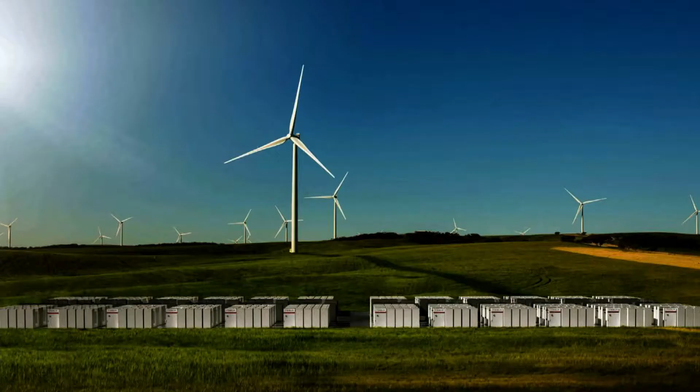And one of the biggest challenges that we have, as Joe alluded to, is how to deal with intermittent solar and wind power. These are zero carbon sources. We have a few others, but these are becoming very cheap and are being deployed at grand scales across the globe. And they bring us to a peculiar stage in how we use electricity.

So again, something that Joe spoke about, if you look at the chart on the slide, that's an average day in California. It might be a hard chart to read on the screen, but basically the top line is what electricity consumption on a typical day was in 2012. So you started at about 20 gigawatts at 12 at midnight. While people are sleeping, electricity consumption tends to be fairly stable.

And then it increases as people go to office and turn on air conditioning or whatnot. Goes down again at lunchtime, and then peaks back up just before dinner. Everybody's got their TVs on or whatever. That was 2012, right? That's just 6 years ago when California started deploying large amounts of solar, utility scale, but also rooftop solar.

And what you see in the middle when the sun comes out is the amount of electricity traveling on the electric grid suddenly starts falling. That's because people are consuming solar right from where it's being produced. It doesn't need to go back onto the grid.

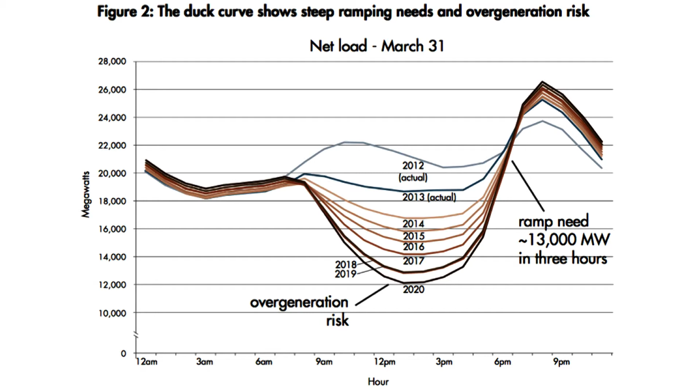And in those days, it has something that is very peculiar to the 21st century, something called negative priced electricity, where the Californian electric grid is paying people to use the electricity. Because if the electricity is not used, the grid can fail, because the grid is like pipes, and if you put too much water in it, it'll burst.

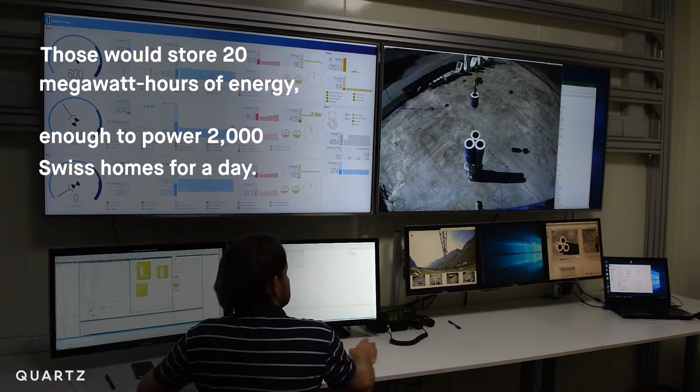Applause there. Okay. That was actually quite good. You left out the part about the nice lunch that we took you to afterwards.

It's great to be here again. Rob Piconi, and we are introducing a new company today, our company, and speaking publicly for the first time. So we actually decided to pull this up a few months. There's an energy conference in Pasadena in November where we're going to be participating to talk a little more in detail and actually launch the company. Our company is an Idealab company.

So how many of you know Bill Gross? I think he's been here before and spoken, many of you. It is a real honor and privilege to work with Bill. I've known him about 12 years now. We have not worked together yet through just a series of timing issues. And Bill speaks about timing, if you've followed some of the things he speaks about, like entrepreneurship, what makes a company successful. Bill, the type of guy that really wants to understand how things work and always to improve performance, studied companies that were successful and those that weren't.

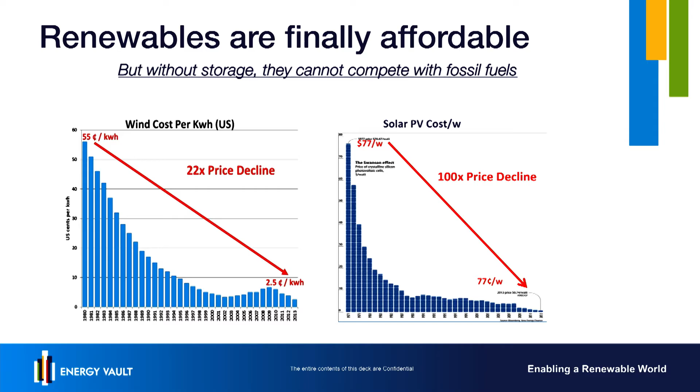So because of this aspect, Joe, one of the challenges we saw in looking at new solutions to solve the storage problem, we know that there's a lot of money going behind battery technology and the development of chemistries, to get batteries that can last longer and not degrade or have loss over time, as well as to bring the overall cost of the battery down.

And when we talk about batteries, it's not just the cost of the battery cell itself, of course. And I think Tesla, you know, is deploying a lot of large battery installations across the world. But in addition to the cell, you have the surround infrastructure to be deployed. And those are things like the inverters, all the power electronics you have to use to manage it. And it drives the cost up very, very high, up in the $400 to $500 a kilowatt hour range.

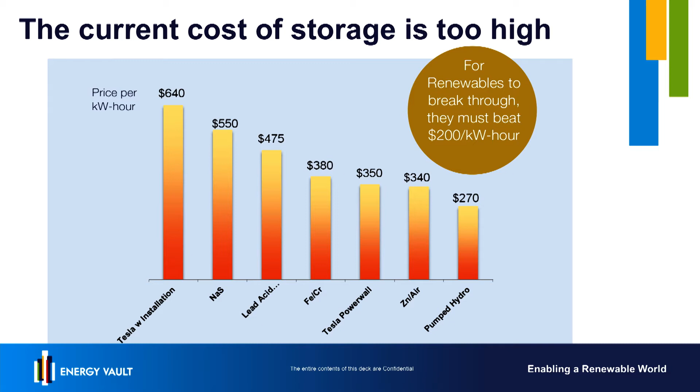We believe that for storage, and this is just a chart here to show some of the costs that you see today, and a lot of these are battery technologies, and to the point that Akshat made, and Joe as well, on pumped hydro, you see to the far right, pumped hydro is one of the most economical ways to store energy. The problem with it, of course, is it relies on topography. And you heard Akshat say that over 95% of the storage today is actually hydro.

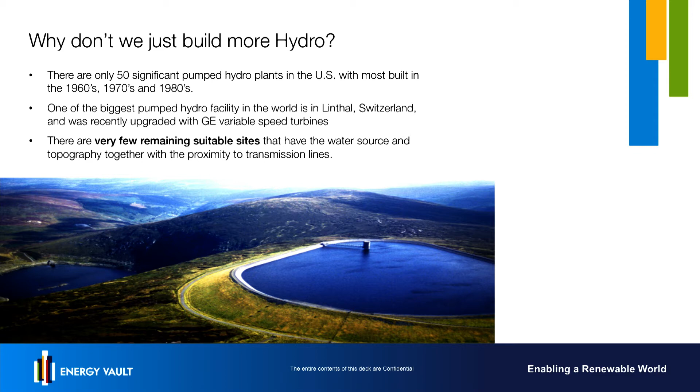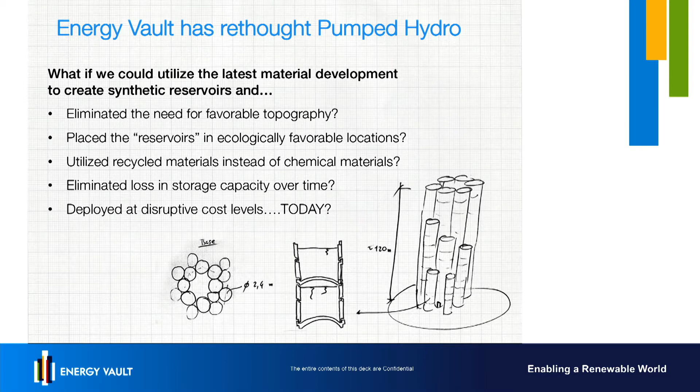But you can't really go and deploy pumped hydro anywhere. You have to have the geography, the topography. And so as we looked at the challenges, Joe, we thought, okay, let's start with thinking about pumped hydro, and what if we were able to replicate all the benefits of the storage capacity of water and the length of the storage, as well as get to a cost point that's well below not only the existing solutions today, but well below even pumped hydro.

And eliminate some of the challenges we've had in the past, the topography issue, trying to understand if we can actually deploy something without having environmental problems. Not only an environmentally recyclable solution, but something that actually utilizes a material that today we have to pay to get rid of and put in a landfill, for example. So wouldn't that be interesting to have something that actually could have a negative cost to your solution

to solve that cost problem? The other thing we thought about in looking at this solution is something that we could also deploy in a mobile way, next to existing infrastructure, utilizing existing technology. So these were some of the challenges that we looked to overcome. And as we looked at this, and I want to go back one, I know Ben really likes this one, the initial idea, the evolution of the idea, which I want to share a little bit about.

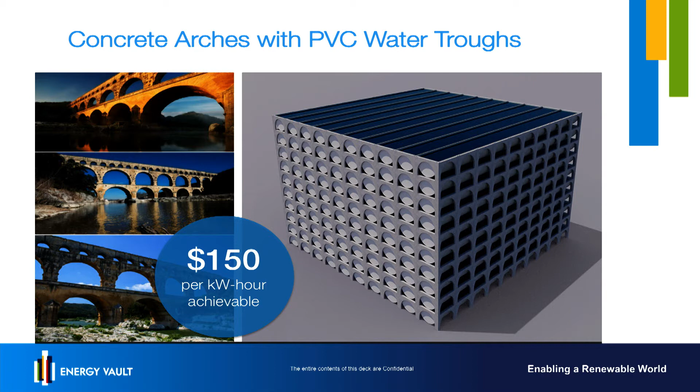We looked at developing and utilizing water as a storage mechanism, these large troughs. And again, we put the ancient Rome here on some of the arches, but we developed PVC troughs where water would flow down and then, like pumped hydro, be pumped back up. One of the problems with this, while we could achieve very good cost levels, is the efficiency. We could get to a round-trip efficiency of about 70 to 75%, which we believed wasn't going to be enough to be competitive over time.

We believed we needed a solution that could at least approximate battery; one of the big benefits of battery is it's very efficient, at 90%. Yeah, the round-trip efficiency is really: if you put 1 unit of energy in, how much can you get out? With a battery it's about 90% because you lose some as the battery heats up while charging. In mechanical storage there are other losses, and water is actually a pretty bad medium because it has so many losses attached to it. Right. And it's difficult in some geographies to find, it's expensive, it evaporates, and all these other nice things.

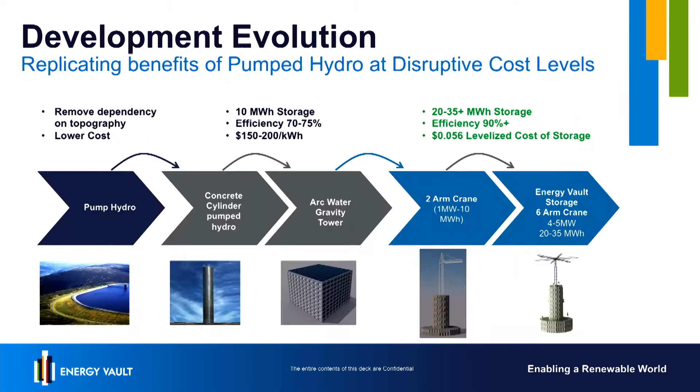So as we developed the idea off of pumped hydro, we looked at low-cost materials and different civil structures that could be utilized, again with gravity as a thesis, and evolved to something that we believe is quite transformational and deployable today, meaning we'll be able to deploy solutions beginning the first half of next year. It achieves cost points at least half or below half the current capital cost, and over time, the levelized cost of storage, it's going to be extremely disruptive.

The solution that we're developing, and I'll put it up here for the first time publicly, is a crane. Big surprise, a crane. Wow, innovation around a crane. It is not just a crane, it is a 6-arm crane. Nothing so technically difficult about building a 6-arm crane; it has never been built before, but we see nothing technologically wrong with that.

The other material we're utilizing is concrete, and not just concrete we have to make, but discarded concrete. The blocks themselves are quite innovative: it's concrete, but it utilizes discarded concrete or recycled material, which has quite a savings and a benefit for the environment. From an economic perspective, looking at the levelized cost of storage, we achieve levels today about 80% below what we see in the market with other battery type solutions.

So in terms of performance it gives us the 90% efficiency. It also gives us longevity; this is a solution that can store theoretically for 30 to 40 years. We understand that with concrete over time there may be some degradation, chipping, et cetera, so there's obviously a solution we have for replacement blocks.

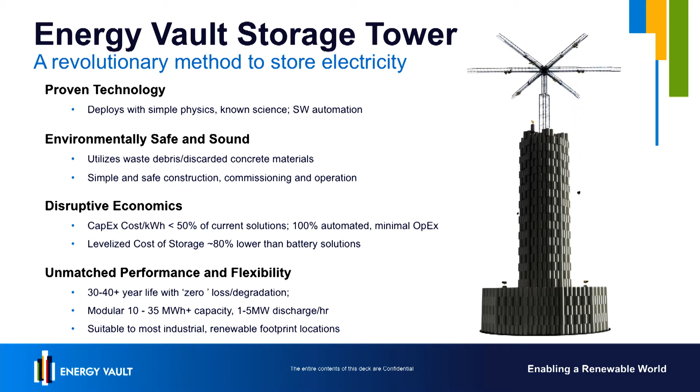It is quite a large tower. This tower is 120 meters tall, so not for your backyard. This is not a consumer device solution. This is something that will exist out near the infrastructures of renewables that are built, the large solar fields, wind turbines and windmills.

And to achieve the numbers we've been able to achieve here, you have to have the height, because fundamentally we're utilizing gravity or kinetic energy, which becomes potential energy as we build the blocks up with our crane, and then as we lower them, we can discharge the electricity.

Our 6-arm crane will do up to 35 megawatt hours of total storage, and we'll have also a capacity to discharge between 4 to 5 megawatts of electricity per hour. To the point of having multiple day storage, obviously you can deploy multiple of these units as well, so you don't have to deploy just one.

And at these cost levels, it's something that economically can be very attractive, and something that in most locations, obviously industrial, not in the middle of a city, you wouldn't put this, nor near an airport, but you would put it out where you're building out a lot of the energy infrastructure.

So the other innovation that's very interesting here is this system is not manned. So it's all automated with software. Software, first of all, that controls the movement of the trolley, because when you're lifting a block that's 35 metric tons, so just to show you here, this is a block of concrete made by machine that is 35 metric tons. We have to control, obviously, things like inertia, wind, have safety protocols if there are storms as well. But it is a system that has very, very low OpEx.

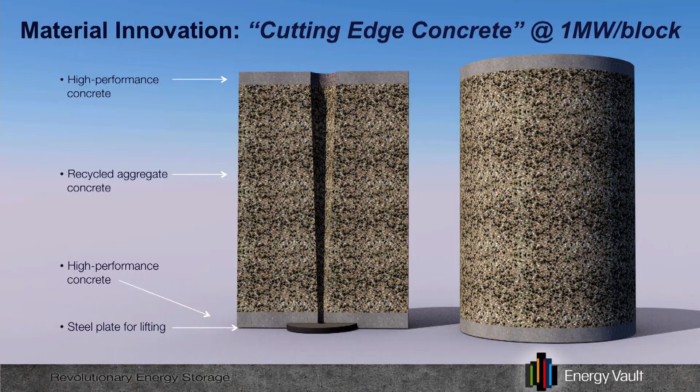It utilizes motors from the standard vendors, let's say you would know, Siemens, ABB, et cetera, that are used for the generation. And essentially with these blocks, we build them up in the tower that then is charged when it's fully built, and then is discharged as it's lowered. So the blocks lower at about 2.8 meters a second, about 10 kilometers an hour. And each one of these blocks, roughly, if you're wondering why 35 tons, it's roughly 1 megawatt of storage in each one of these blocks.

So very cool. And there's nothing like something that ticks off the KISS principle and is implementable now without a needed breakthrough. So with that, why don't we open it up for questions? I'm sure there's a lot of thoughts out there. While we wait for the microphones, one here.

Could they be retrofitted into the elevator shafts in buildings? It's interesting. They could be. They would be sized, obviously, appropriately for that, and we probably wouldn't use the cylinder blocks. We'd customize the brick design, but that's an interesting concept that some people have looked at, utilizing existing technologies or structures that are already using gravity and generating electricity. So that's an interesting point. I don't know if any of that's being done today. I don't think so. So there's one retrofit example.

There are some ports, so if you go to a port where you have these large cargo blocks that are being used, in raising them, you're putting energy in, and some of the ports have now become more energy efficient in that they recover electricity as it's being lowered. And that's something you could do. That's a sort of a retrofit to your existing system, which is being applied in some ports already.

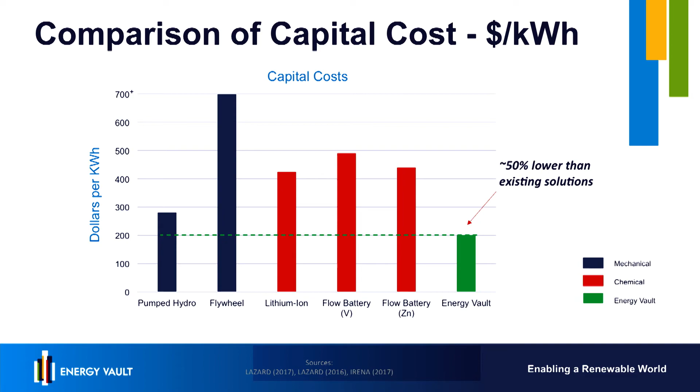So it would typically not sit in pure residential areas, at least for the size of a utility scale unit of this type, but it could sit very, very close to a residential area, out in a larger area, obviously. What I was getting to is, could you put it in a rural place in Africa and be able to give people power that don't have power?

Sure. The only issue is the transmission. Sorry. The question was about having it in a rural area in Africa, and have that be utilized to give the population electricity. And the only issue we have with that is the existing transmission lines that are in place. So you'll still need some way to generate power to be able to build this tower up. It's just a storage solution. It's not a generation solution. We don't do renewables themselves. So we need renewable energy to feed it.

Yeah. Albert. Hi. How many configurations did you look at before you settled on the 6-arm crane with the barrels? Just curious, how long did it take to get to that model? And one added question, why do the lower levels have to be concrete blocks? They can be just a permanent structure, right? Because they won't have much gravity to take back energy.

Sure, the base of the structure is actually thinner and lower, exactly for that reason. And then initially we were thinking of an 80-meter tower, but we went up to 120 meters to be able to have more capacity. So, to answer your question, we did go through different iterations. We started with a 2-arm crane that had 10 megawatt hours of storage and was able to discharge 1 megawatt of power, and then optimized around the 6-arm crane based on customer feedback, roughly 20 megawatt hours of storage and the ability to discharge at about 4 megawatts per hour.

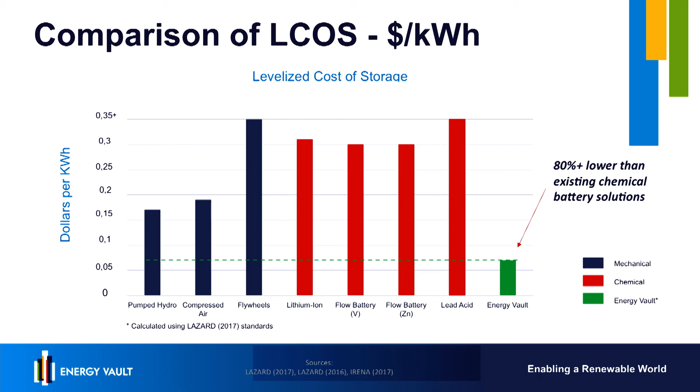So they will have a place. They will solve, I think, some of the issues around the degradation of power and also the recyclability over time. But it's going to take time. I think Akshat said you're looking at 7-10 years in development, and then beyond that as well to get to scale.

This may be a naive question, but it's a lot of tonnage you guys are dropping. Is there a possibility of vibration, and what about sound? Yeah, great question. On the sound aspect, it's actually quite quiet. When Akshat was on, obviously these are much smaller barrels. There's not a lot of noise made, also because of the way the trolley and the wheels are designed. It doesn't make a lot of noise.

You'd be surprised, but we haven't built the full-scale model yet. But from everything we see, that's not going to be an issue. Regarding the weight and the size, if you look at what we're going to require for land for this, there's a safety field also around. So we have about 80 square meters in diameter that we're going to need for this field to account for, in the event there's a drop of a block, that we don't have any damage to life or risk to human life.

So clearly, the regulatory and all the different community approvals are going to be important, right? And that's one element of it, the noise. And there's certainly some great examples, Harvard Business School case studies about wind farms off of certain coastlines that you thought would be approved, but were not. So what is some early thinking about that?